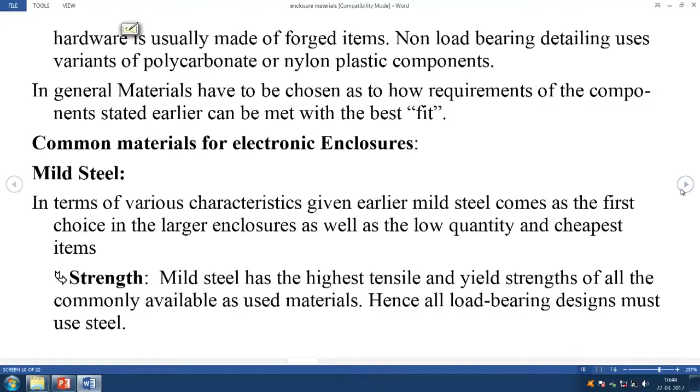Next I talked about thinness. Thin sections can always be made with mild steel, as used for portable equipment. Portable equipment needs to be light. The moment they are light, the thickness needs to be small, because for a given volume, steel is still heavier.

What is somehow a little problem is that corrosion resistance is not very good in the case of mild steel. It rusts easily and does not have any corrosion resistance.

Protective electroplating is carried out with zinc, cadmium, nickel and chrome. Nickel and chrome give it a very attractive finish, and often mild steel is chosen so that nickel plating can easily be used as a decorative finish.

This I had given you an example of car bumpers and so on, saying earliest they were made with mild steel, and then as the thickness can be made smaller, light weight also can be reduced, and then everything is chromed. So even today, except for some high performance bicycles, bicycle rims and motorbike rims, all those continue to be made of steel.

So the word mild is not a very good word to say, but still, because of the small traces of other materials compared to pure iron sheet and compared to very high carbon steels, it is called mild steel because of the composition.

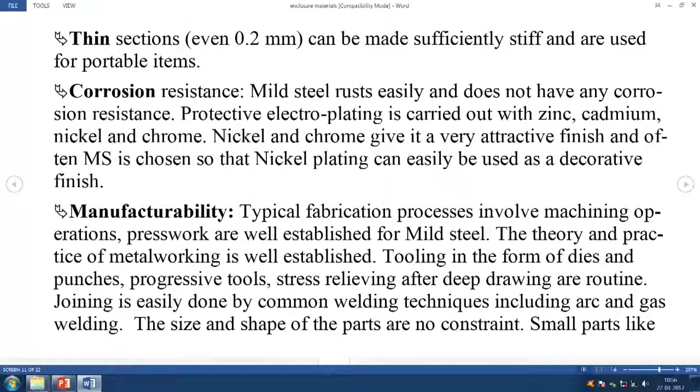Size and shape of the parts are no constraint. Very large parts can be done. Small parts like link levers, support brackets and such are easily fabricated using blanking. Large parts like doors and panels of racks used in process control equipment installations, which are not handled frequently, are still made of mild steel.

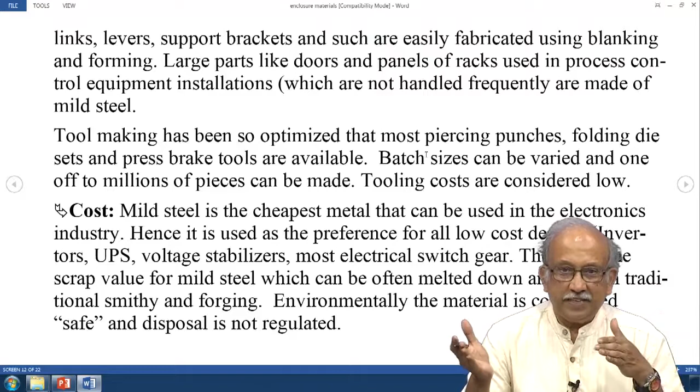Tool making has been optimized such that most piercing punches, folding die sets and press brake tools are available. You need not go about designing one more. In fact, if you go to the manufacturer's catalog of any punch equipment, you will see these prefabricated punches and dies of various openings—everything is available. You need not go around and try to make it.

Tooling costs as such are considered low. You can go to any person who does this fabrication for you, and depending on their load, they can accommodate you. Mild steel is the cheapest metal that can be used in electronics. It is used as a preference for all low cost designs—inverters, UPS, voltage stabilizers, most electrical switchgear—and most important, it is highly recyclable.

In case something is a problem, you just strip the whole thing and then you can give it back for disposal, safe disposal. Unlike other materials, it is not so bad.

Mild steel of different grades is easily available. Besides several gauges of sheet, cold roll sections like channels, angles, tees are supplied in small lots. You just need to go to the store and buy them. There are huge pipeline inventories, and procurement of special items is not very difficult.

Pipeline inventories means something from the original manufacturing place all the way to your last retail. A lot of stuff is stored in different places. Now, in case something is in the catalog, if you are ready to wait, you can eventually get it.

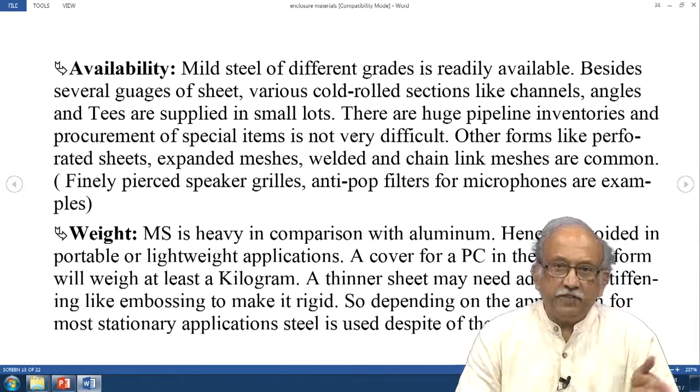You have other things like perforated sheets, expanded meshes, weld and chain link meshes, which are common. Speaker grills, anti-pop filters for microphones are all examples. You have them everywhere.

It is real—yesterday I showed you the example of this wireless set, remember? It's again a steel item. This clip here on this is a steel item.

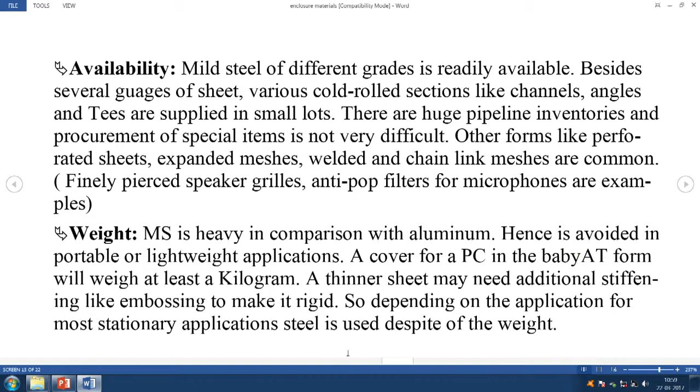Weight: mild steel is heavy in comparison, hence it is avoided in portable or lightweight applications. A cover for a PC in the baby AT form will weigh at least a kilogram. A thinner sheet may need additional stiffness, so depending on the application, for most stationary applications, steel is used despite its weight.

Appearance: raw mild steel cannot be used in its original form since it has to be plated. Steel is chosen as a base material where chrome or nickel plating is applied.

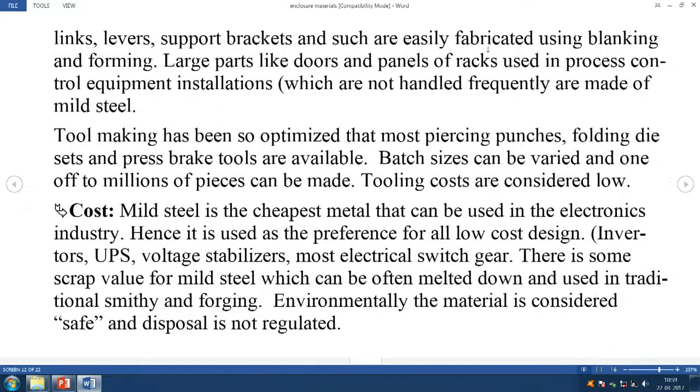Steel does not have any inherent structure, however it can be brushed to get a special look. It is etched or embossed to give special textures. Sand and shot blasting—that is, you take a sheet and direct some grit through air or some other medium—any special texture you want can be made.

You would have seen the tread steps that you see across. Sometimes if you have an internal staircase, you get the tread sheets with 4x4 embossing and all of it. That whole thing is done in the rolling operation itself—somebody creates the dents—and then it is ready for you.

Some of you must be familiar with structural rods which are called Tor steel. Somebody long ago took a patent, did a lot of observation and analysis where analysis and observation go together—why is RCC failing? RCC often fails because the core reinforcement appears to move, and the moment it moves, the game is lost.

So to prevent it from moving, they started putting all sorts of features on it, which is part of the manufacturing process. Eventually, now in fact to get a smooth rod is difficult—most places you only get the tough, highest quality steel with the highest yield strength, but with Tor steel sections.

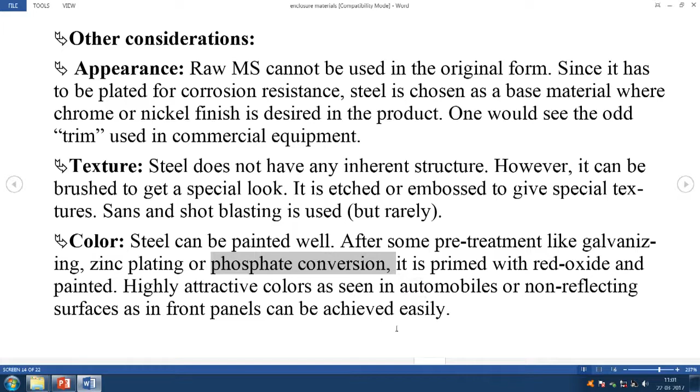Pre-plated steel has various advantages. Normally, because of susceptibility to corrosion, some oil gets coated or sprayed on. But still, occasionally you find them damaged. So tinned and galvanized sheets are also supplied. I was making a reference to your car door yesterday. All car doors are mostly embossed from pre-galvanized sheet.

Galvanizing is nothing but dipping the material in zinc; otherwise they are all zinc plated directly. Electroplating is called electrozinc. Dipping in a hot bath is called galvanizing. The base material is usually mild steel, and what is coated on top of it is zinc.

In case I have made a mistake on the nomenclature, kindly give me feedback, but that alone does not help. You can give me feedback, but also go and check it out yourself by checking the actual sections, asking somebody what it is like. Reading will take you to about 90%, and the last 10% comes from physically checking the particular thing.

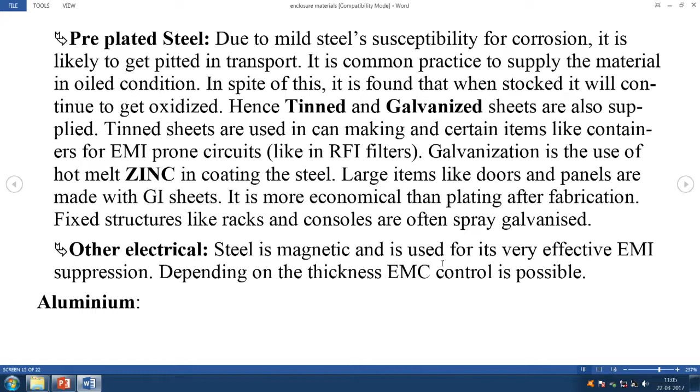Steel is magnetic and is used for very effective EMI suppression. Depending on the thickness, EMC control is possible for electromagnetic interference. The openings inside are a very critical thing. By some laws of physics, miraculously any opening less than 2.5 millimeters, like a small punched sheet with a 2.5 millimeter opening, generally keeps out all radiation. I think there is a 30 megahertz limit, so for things between say 30 kilohertz to 300 kilohertz to 30 megahertz, this acts like an effective shield.

Interestingly, that same 2.5 mm figure is used in your IP specification. I do not know what came first, whether the openings became this much, or 30 megahertz was the critical thing, or the IP rating came first, but all of them are nicely integrated and made for each other. So if you have a perforated sheet with 2.5 mm small openings, you can safely use it, and most RF applications at the lower frequency go up to 30 megahertz, which is considered the old standard for RF equipment.

Next I come to aluminum. At this point, the first part of it I have read along with you; this is available in both formats. We have a recording here, then a PowerPoint presentation, and text which I have written up. I expect all of them will be available to you, but with the usual watermark feature, so you can read it for yourself.

The second most common material used in electronic enclosures is aluminum. Aluminum has only a third of the yield strength of steel. However, in several applications, gross strength of the material is not the prime consideration. Strength to weight ratio is higher than steel. Critically designed components in steel cannot be substituted by aluminum. It is reality. If something has been made such that only a steel structure can hold it, just substituting one for the other does not help.

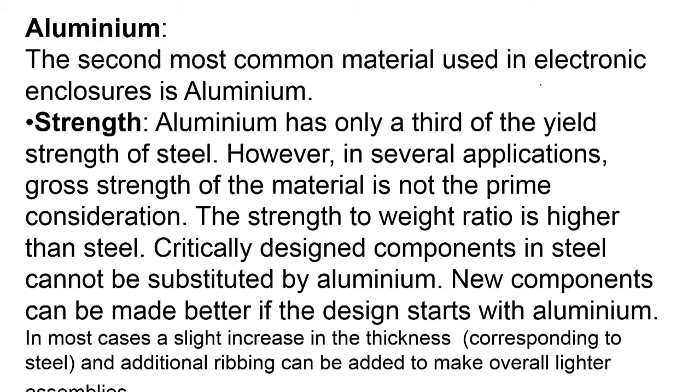I have already given you the example of your bicycle frame. If you have the basic trapezoidal bicycle frame, I hope you remember trapezoidal, I will just write it in the space available here. So, slowly my bicycle is getting ready.

So, triangle here and a near triangle here. The way this whole thing has been optimized, if you just, without due consideration for all the other operations, replace this trapezoidal frame with aluminum, you may end up with problems. It is not stiff enough, and we have other problems depending, unless the grade is very critical, and automatic replacement is not possible.

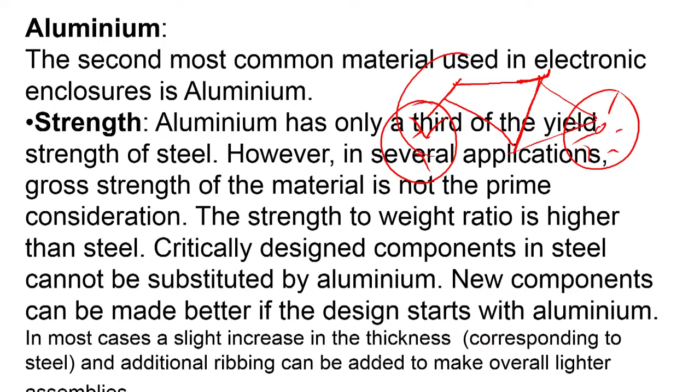New components can be made if the design starts with aluminum. A slight increase in thickness corresponding to steel and additional ribbing can be added to make it overall lighter. Special grades called the 5000, 6000 and 7000 have been developed, which are used in aerospace. Spin-offs from this are used in high-end commercial equipment like cameras, video and scientific equipment. In India, only some grades with silicon and magnesium are available in the construction industry. Profiles, sections, and extrusions for racks and cabinets are all made with aluminum.

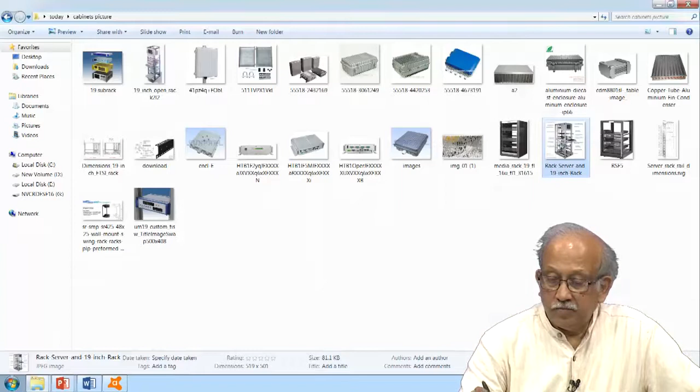So, at this point I will see whether I can go to a rack which you are likely to find anywhere. I have just randomly taken it from the internet, but you see here these vertical members are there. Depending on the design, it is possible for us to make it out of either aluminum or steel. Originally, the load bearing things, all these vertical items, used to be made in steel once upon a time, but right now all of them have been replaced with aluminum extrusions.

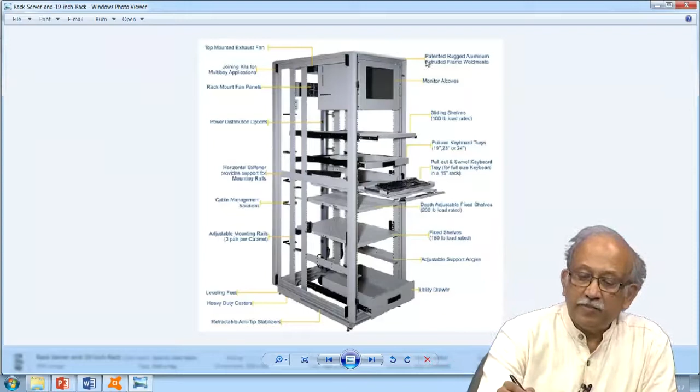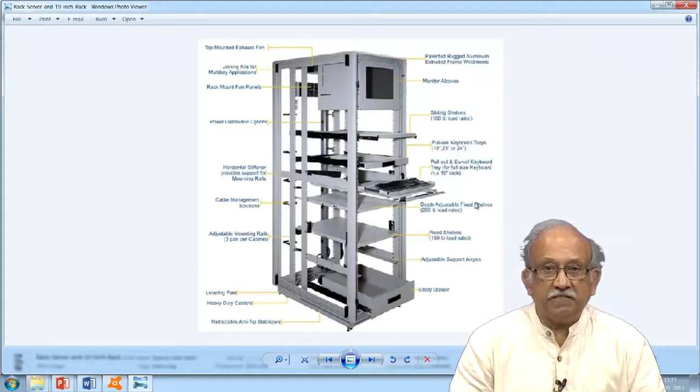This picture is quite the same as what you had in the other picture. Now, you see here we have a beautiful place for a monitor, then you have a place here for a keyboard, and since this is a little familiar with you, then there is a utility drawer, and then we can make this whole thing. Most of the load bearing things in this case are made with aluminum, except a few things like this drawer and some fixed shelves. Everything else comes with the extruded section.

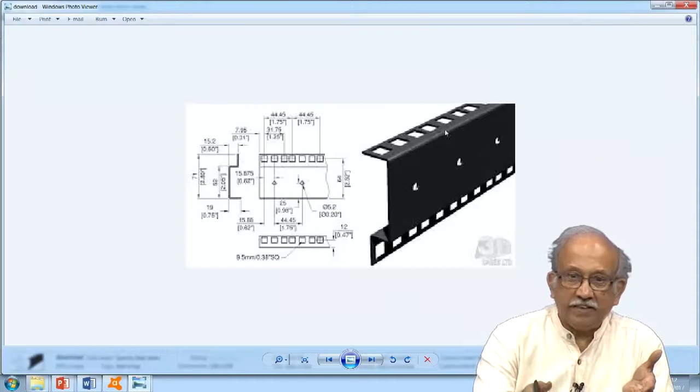Probably this is the vertical section which you find. So, some of them have been made with mild steel. Punching these things in mild steel is very easy. Now, they have been able to substitute this with aluminum also. Instead of having a separate piece like this, they are able to start the design with aluminum, and then you can optimize these things.

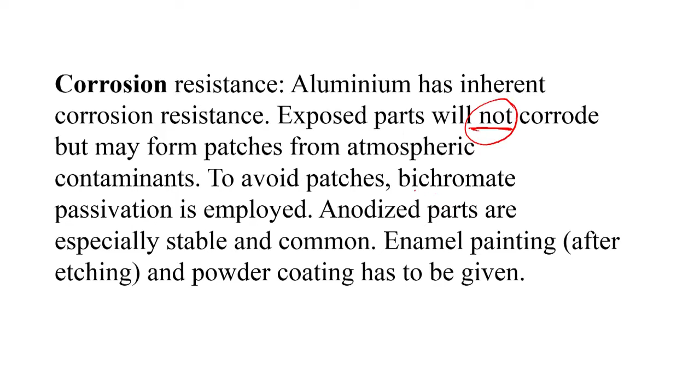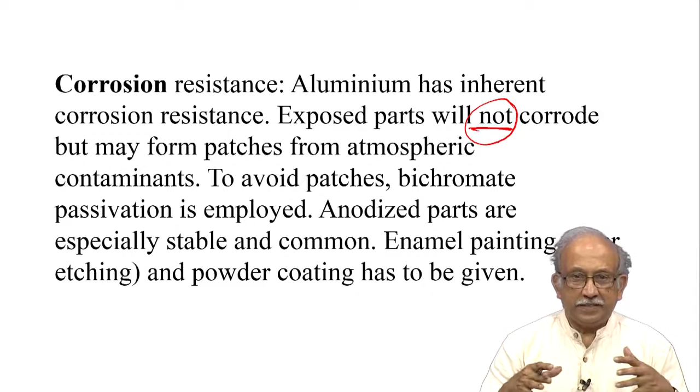Main thing about aluminum is it has an inherent corrosion resistance. Exposed parts will not corrode, but may form patches from atmospheric contaminants. To avoid patches, bichromate passivation is employed. So, potassium bichromate solution is made, and the part is dipped in it and taken out. Anodized parts are stable and common. The anodic layer is nothing but an aluminum oxide layer. Conventional electroplating makes the part or job the cathode, but in this case it forms the anode, and then some material gets carried away and oxidation takes place, and then they seal it. The advantage in the end is that you have a very stable, inert layer on top, which is what we are looking for.

Enamel painting after etching and powder coating can be given. The moment you have this powder coating, you have an advantage, especially because the skin formed by that powder after baking is generally very impervious to outside contaminants, and inherently it has a pleasant appearance, non-reflective, or reflection can be controlled, in any color of your choice. These days various furniture items and all that do not use plating anymore, because plating involves chemicals which are not easy to dispose of. In the case of powder coating, except for maybe degreasing, washing and a little bit of solvents, it is probably a little more environmentally friendly.

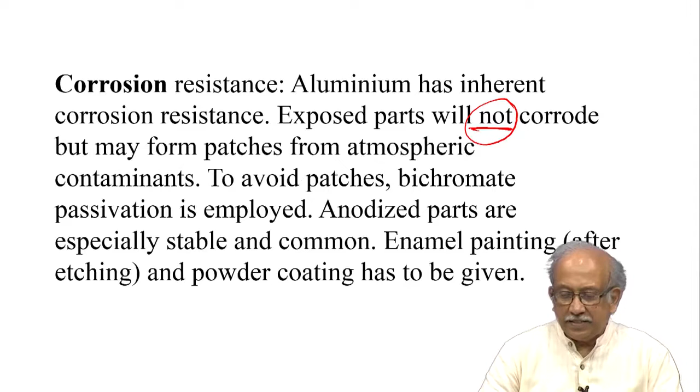Aluminum manufacture uses the same basic tools for sheet metal operations. Load and tonnage requirements are lower for presswork. Special composition alloys have problems in forming and may show cracks. So, if something is made strong and also tempered during heat treatment, naturally it will become brittle. There are various tests that can be done, and it is possible for us to make or accommodate design upfront for these things.

Mishandling on the shop floor leads to scratches and tool marks. Items like profiles and flats are easily machinable. Composition has to be verified. Softer alloys are considered a nuisance for machining due to their high ductility and poor chip-forming characteristics during milling.

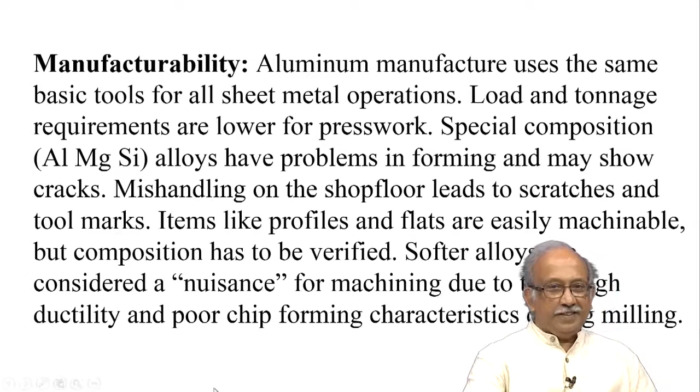Machining is not easy, though it looks like you have a nice machine, you load the job, and everything comes out. A lot of practical considerations are there. The only safe, good material as of now is still brass. Inherently brass chips form, they break easily, and a nice finish can be obtained, and over brass you can plate most of them, and it is good, but it is ridiculously expensive and not strong enough for us.